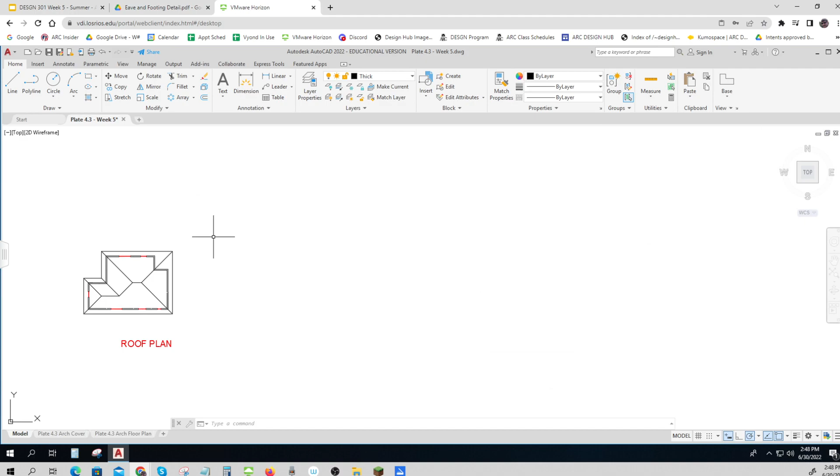First, I'm going to draw walls. Those are going to be on a thick layer, so I've chosen my thick layer. I don't know how tall they'll be, I'll draw them like 4 feet. And that wasn't even straight—let me get my ortho on, it'll be a little easier for the start. Okay, so there we go, 4 feet.

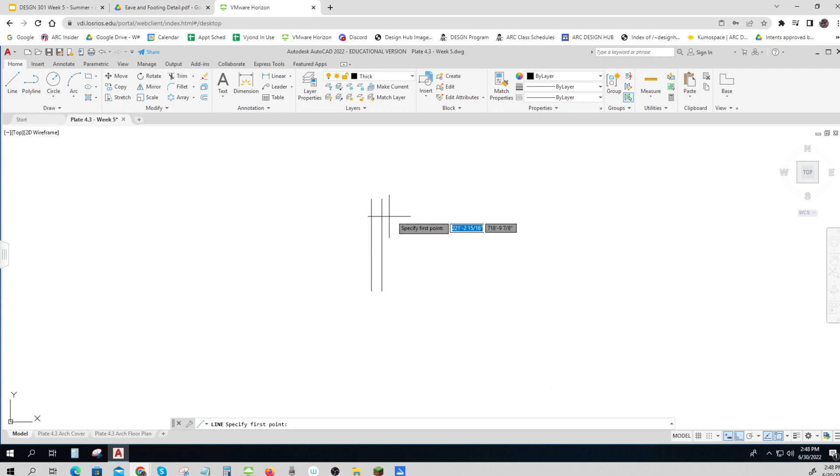Offset 5.5 inches. And then I'll draw over maybe another 4 or 5 feet—let me go 6 feet this way. And we have another offset of 5.5 inches. So I've just drawn the wall and the ceiling joist.

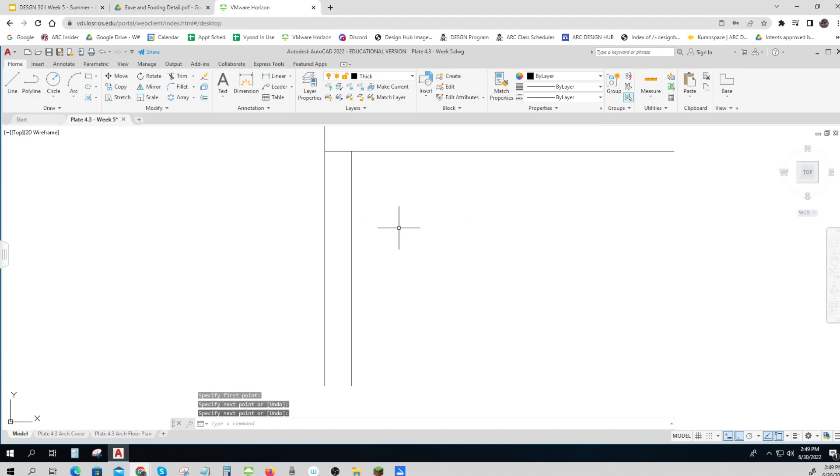Now the blocking is 1.5 thick, that's the thickness of a 2x6. And I can do some trimming.

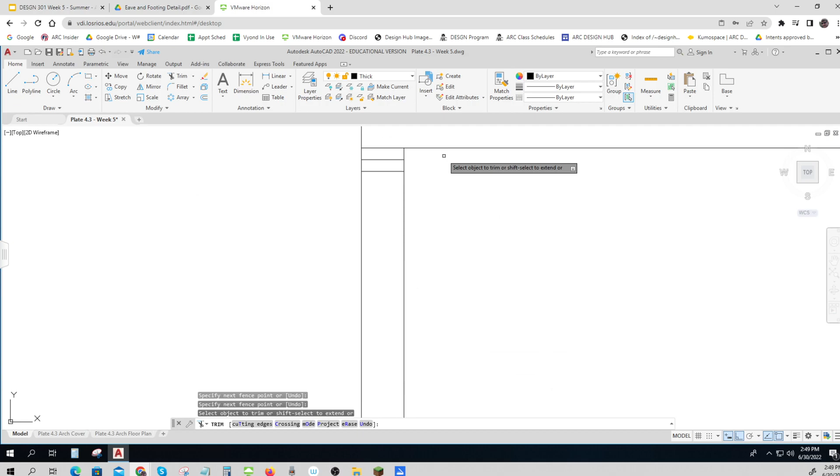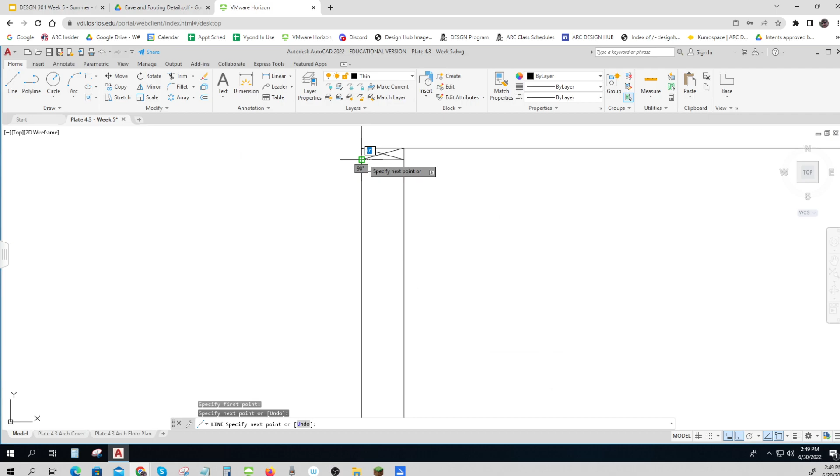And then on the thin layer, I'll draw those X's. That means that this is a cut, but the piece of wood goes unbroken through the entire. It's hard for me to draw while I'm talking, you guys—sorry about that. There we go, it's much easier for me to draw when I'm not talking.

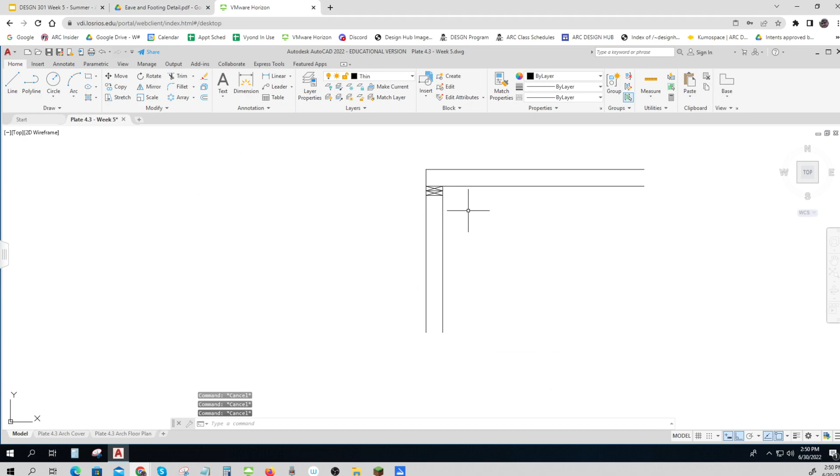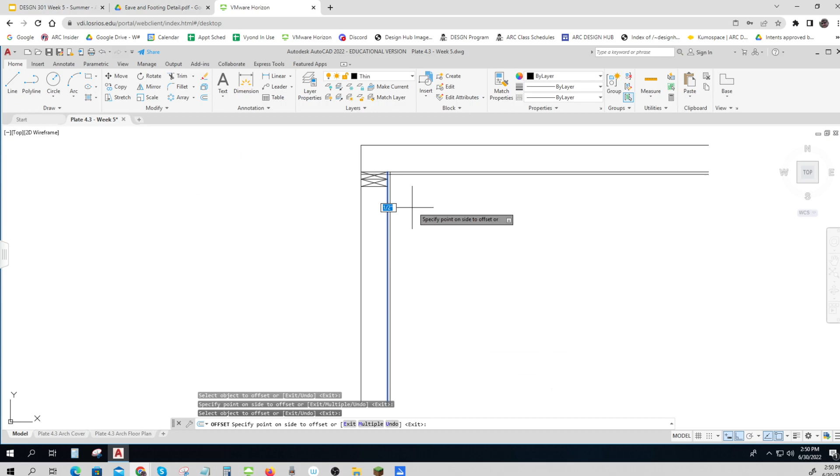And then all of that goes on the thin layer. And then I know that this inside offsets 1/2 inch. And I need to do a little trim—most people wouldn't see that, but we want to take care, best job we can. Okay, so that's a big part of what we've— oh, and I've got to get rid of that little part.

Okay, our next step is to draw those rafters, so I'm going to offset 2 feet, just so I know about where that thing's supposed to end up. And then the fascia board is 1.5 inches thick, so I'm going to offset 1.5 inches.

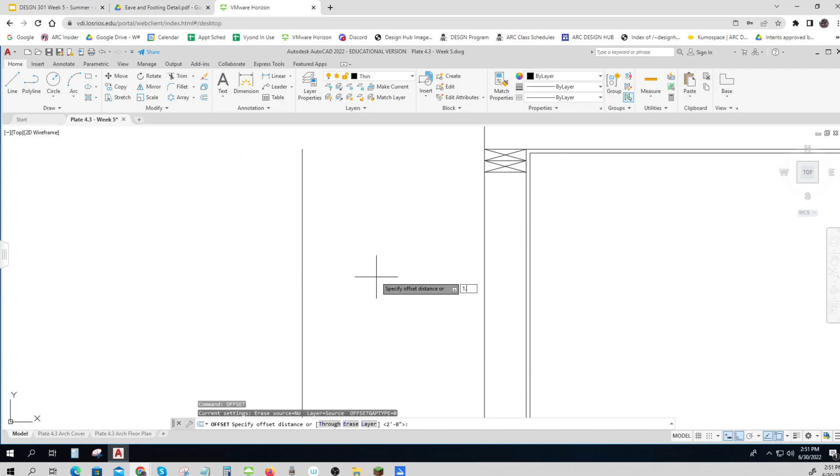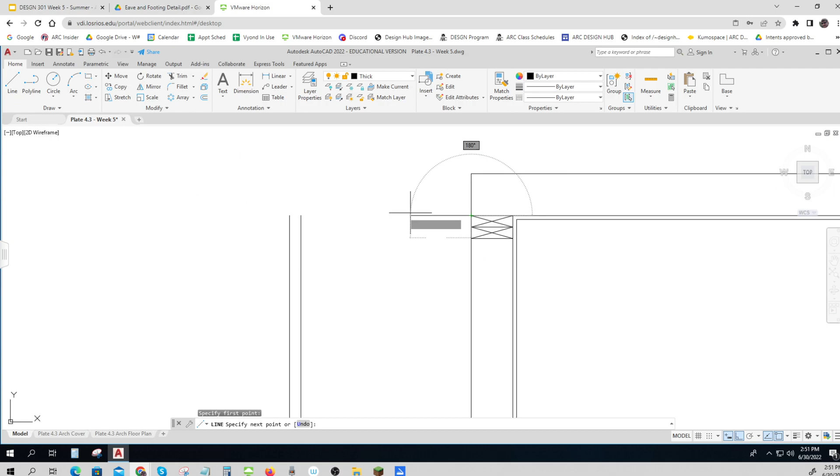Now here's the cool thing—probably make my cursor pick a little bit bigger, but that's okay. I know this slope, and I'm going to put myself back on my thick layer. You can do all this layering later on. I know it goes over 12 inches and down 6 inches, and then a bit of my ortho, I don't need it. I'm going to get rid of my dynamic because I don't need that.

It'll go a little smoother. So that's the bottom of my rafter. And there's a very cool command called extend. I'm going to extend that line—oh, isn't that cool? And then that's going to offset 5.5.

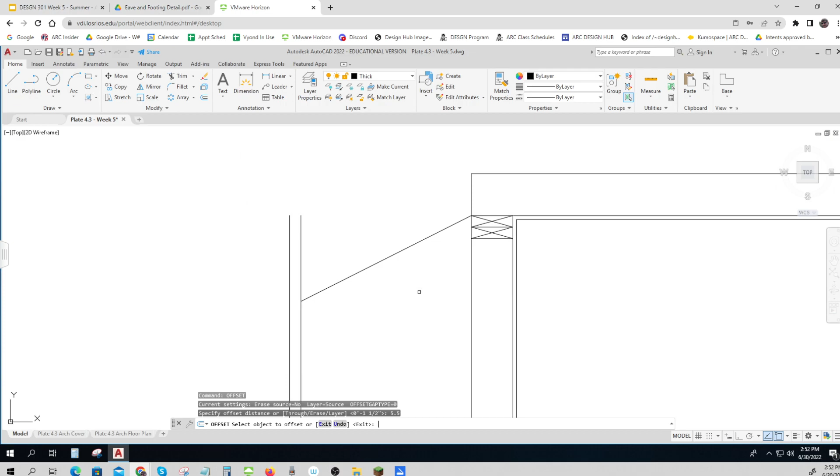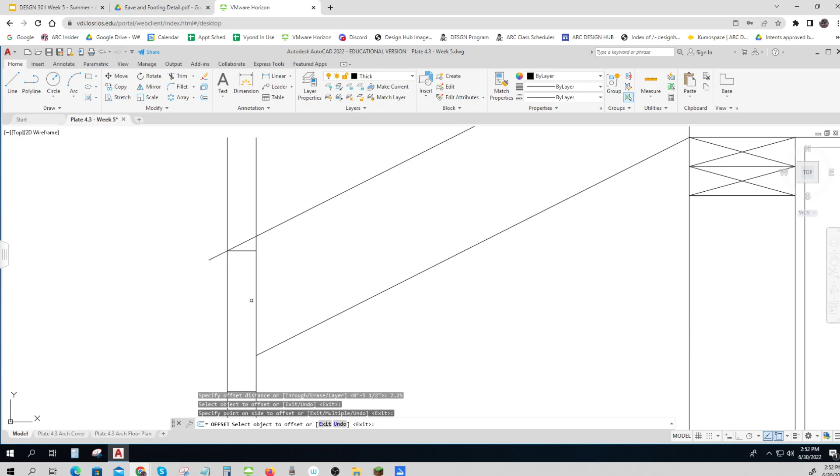Now, I recall from the drawing that the 2x8 goes there, and an 8-inch lumber offsets 7.25 inches. When you take materials of construction, you'll learn all about why that is. And now I can do some trimming.

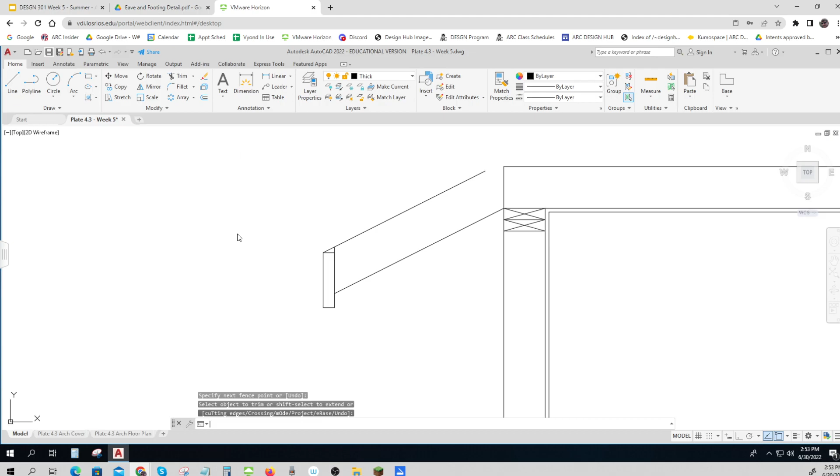I've got a lot done, so I think I better save this. Doing pretty well. And this little bit is going to trim also. So I've got a lot of this done.

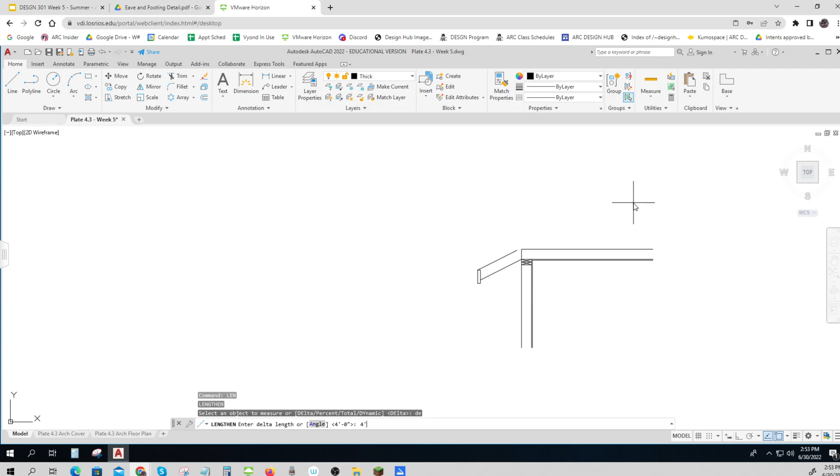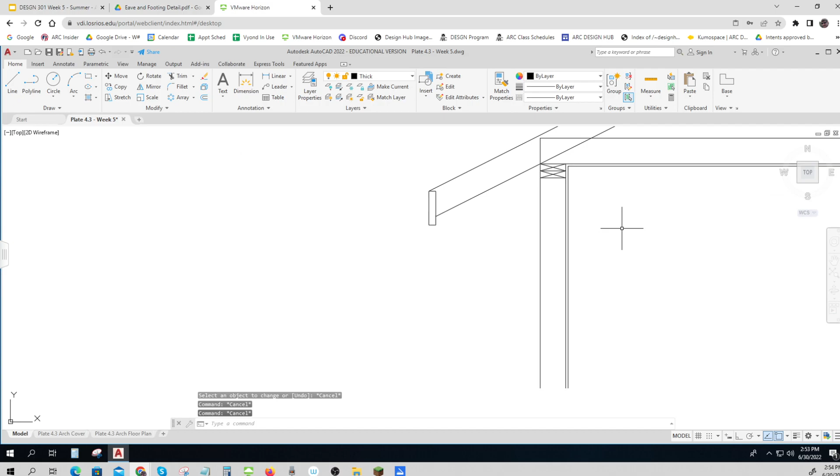Now to get this to lengthen out, there's a command called lengthen, L-E-N. I'm going to do the DE command, a certain amount, and go 4 foot at a time. I'm going to lengthen this one 4 foot in, and I'll do it to this one too. I've got a lot of this drawn already—this is so cool. And then I think I have a trim right over here.

Right here. There we go. So I'm getting there, it's getting close. And now I've also got a line from this corner perpendicular. If I go shift right-click, I can choose perpendicular. And that's a piece of blocking.

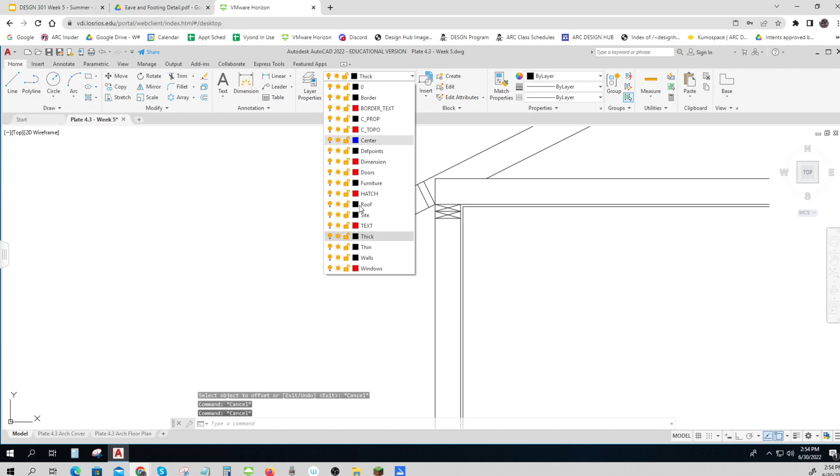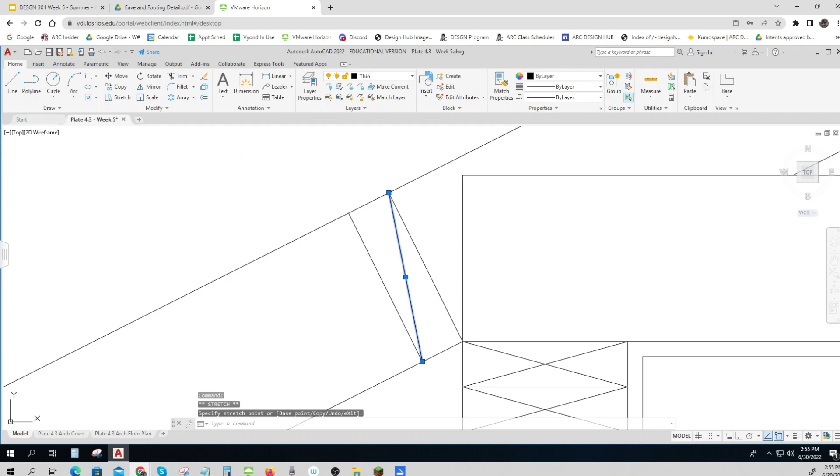It offsets 1.5 because it's a 2 by 6—2 by 6 is 1 1/2 thick. Now on the thin layer, I just have my little lines that show that this is blocking. Now this one only gets one line because it's broken up in between the rafters. Moving a little better. And this one gets both lines because it goes the entire length without being broken. If you've walked under the eaves, you know what that looks like.

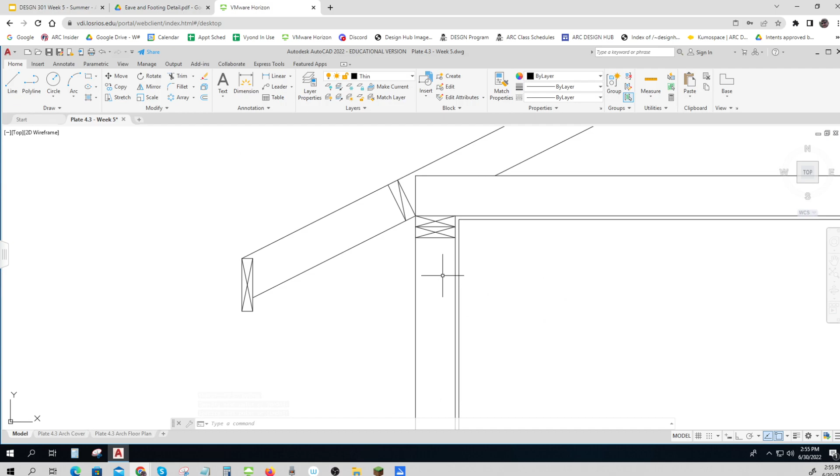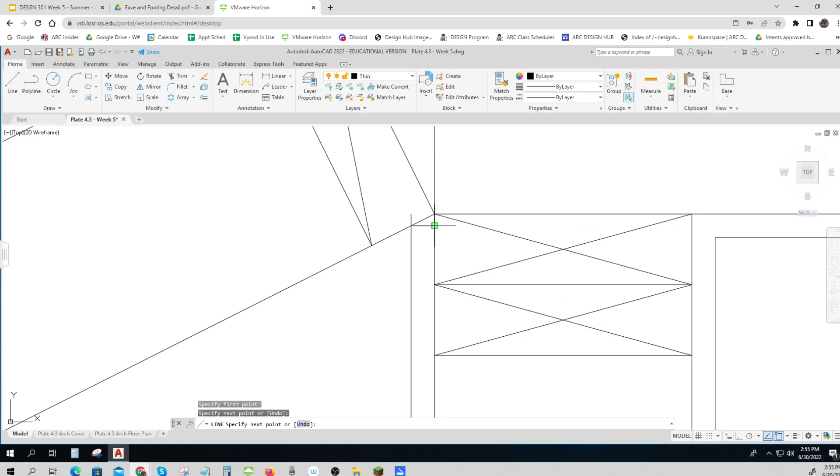So I'm most of the way there with my drawing. I've got an offset to do here of 0.5, that's my T1-11 siding. Tiny little line here. And really in many details you wouldn't bother with this, but it's giving us practice how that works.

Okay, now I'm going to do one more thing for you. I'm going to show you, if you're in VMware, you can get right to this—I'll post the link. I'm going to insert a block now. I'm going to go look at that from a blocks library, or I can look at blocks from library—well, I can go around and look for it.

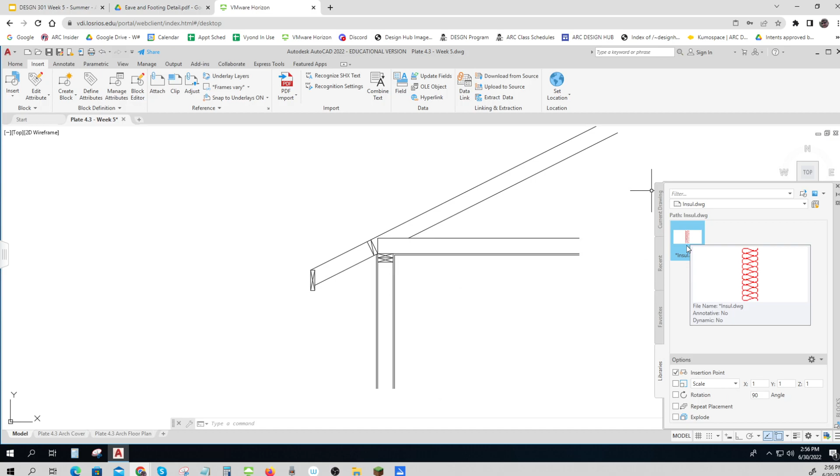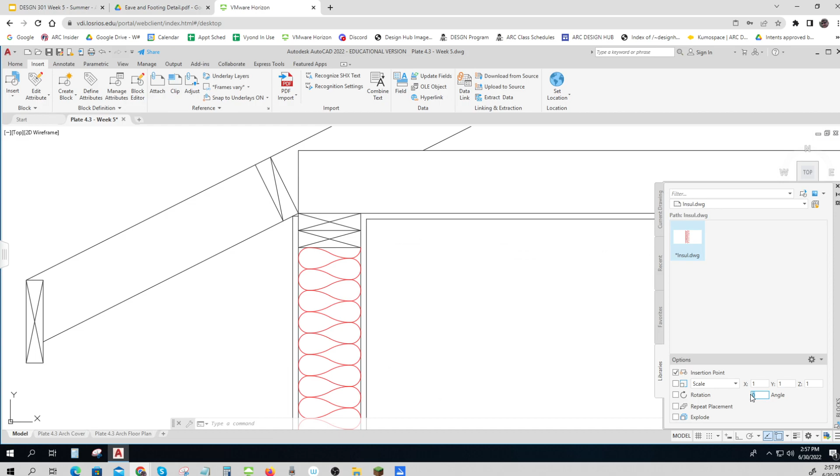You can look for it on your computer, but here's one called insulation that I've loaded. So I've loaded this one, and I'm going to put it in—hold, drag, let go—and now I can move it into place. Now I can make a copy and rotate it, but I can do that automatically by typing it to go in at a 90-degree angle. And now it's at an angle—isn't that cool?

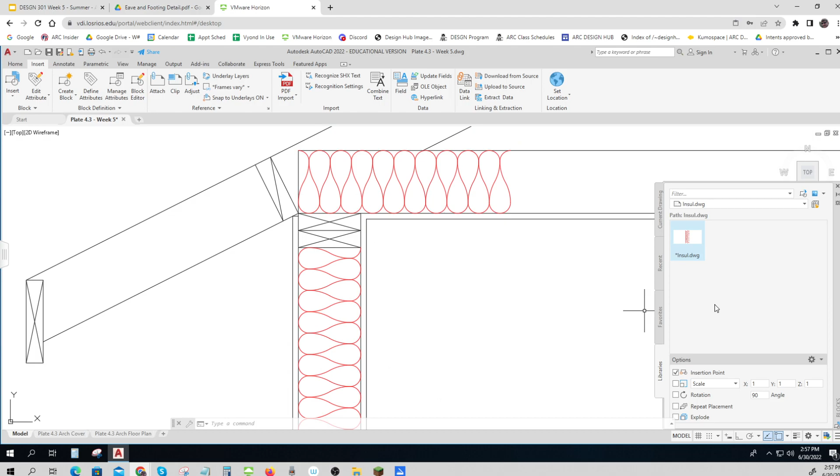Move that so that that endpoint is right there. And I can put another one on, but that gives me a...

Okay, so I'm almost done. I just have to draw my little kind of cut lines. Those also go on the thin layer. And you just draw a line. Ortho back.

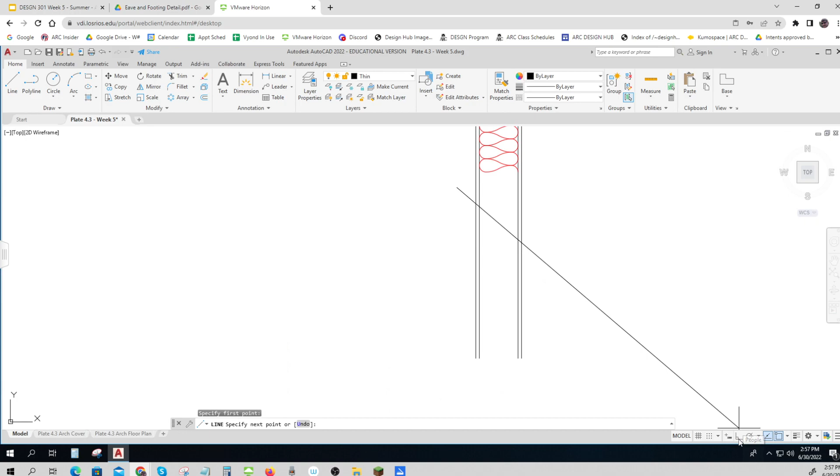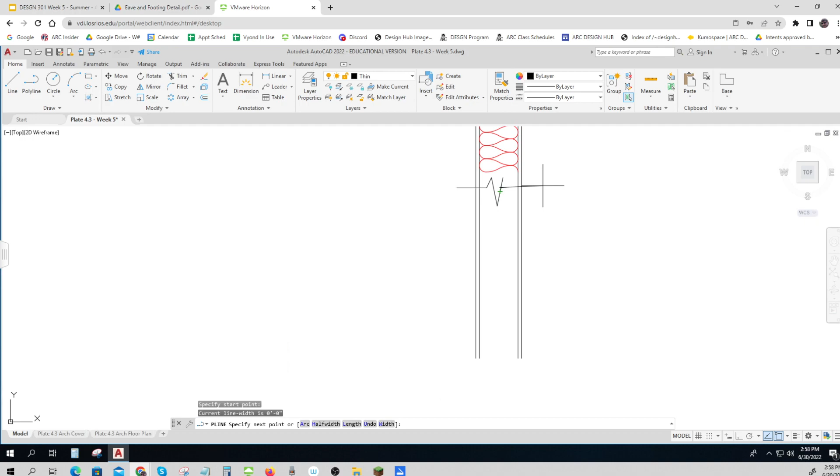Actually, instead of ortho, I'll put my... I'll turn that off too. I'm just going to go up, down, up, I'm going to come down even with there. There's my cut line.

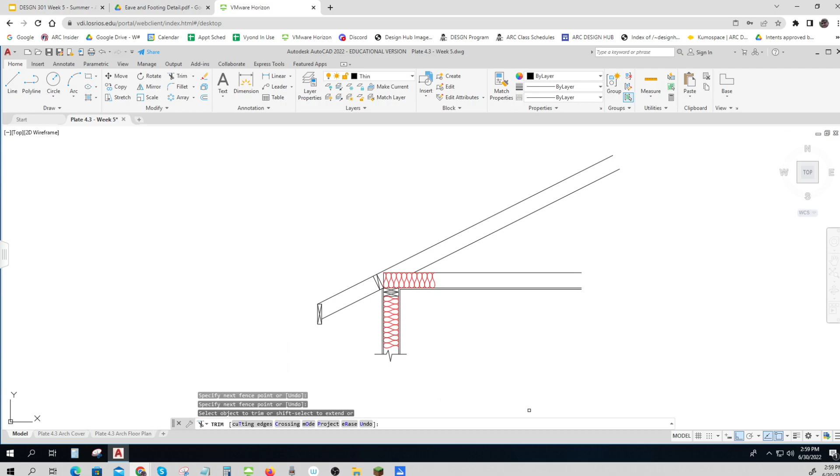And then I'll do the same thing over here. It doesn't have to be way far away, just somewhere over here, probably like off of that 4 foot. Also, I do have to have some room later on for some writing, and so that's where you're going to go with it.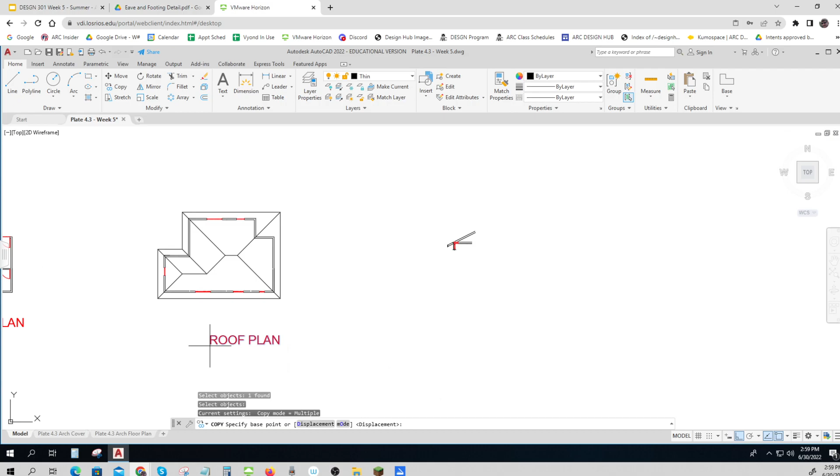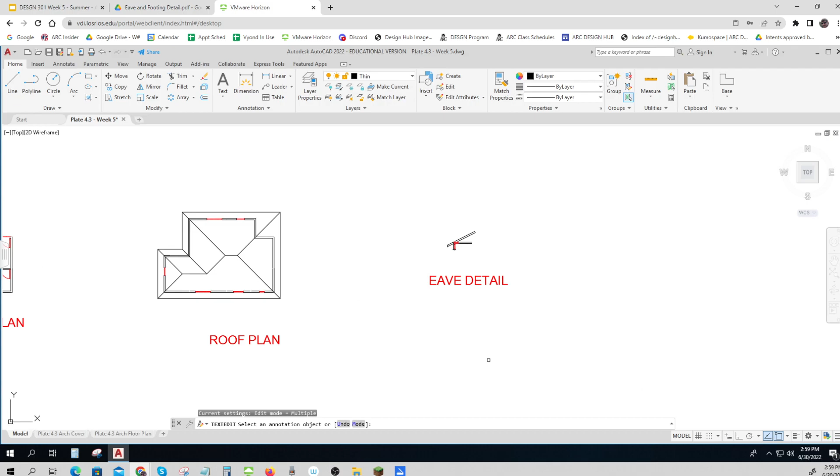And then I'll better do a save. It's everything—everything's all full scale, that is as big as it is. So now I'll do a copy. And that's my eave detail. There we go, that's how you draw the eave detail.